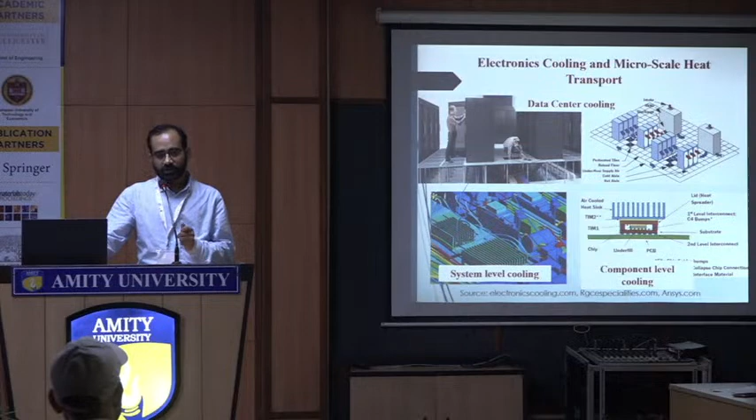So as you know, like how we are cooling the data centers and the computers, and the heating problem in mobiles and laptops, etc. Starting from the chip, which is very, very small, how can we cool it where the heat dissipation is very high, of the order of 100 to even 200, 300 and more watts per centimeter square area, which is very high. If you compare it closer to a power plant, then it reaches closer to nuclear power generation.

In the beginning, when the number of transistors in a chip was very small, it was not required to cool the chip using non-conventional ways, and it could be cooled naturally, sometimes by forced convection through air. But over time, as the number of transistors increased, and nowadays integrated chips are highly dense with millions and billions of transistors inside a very small chip, they dissipate a lot of heat.

So what is the temperature we want to keep the chip at for proper functioning, so that it has a longer life and can sustain as well? We have a range where we can maintain the chip at 40-50 degrees Celsius, and at the most we can go up to 80 degrees Celsius.

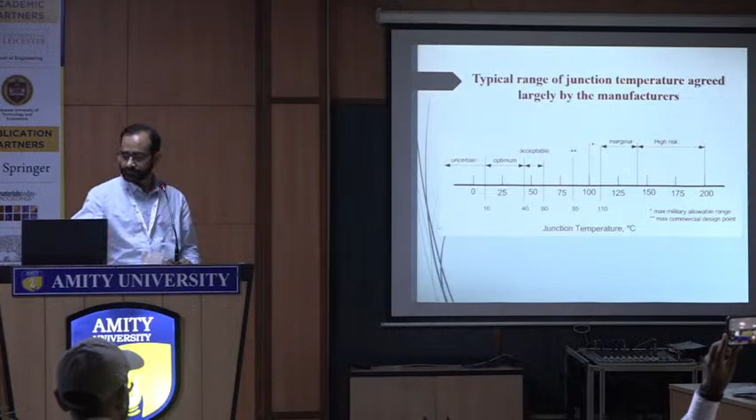And the heat dissipation over the chip surface, if you go over the years, we see that the heat dissipation from the chip is continuously increasing due to the high density of transistors that the chip consists of.

So what is the reason for electronics failure? If you look at it, the major part of electronics failure is temperature, including other factors like humidity, dust, and vibration of the electronics as well.

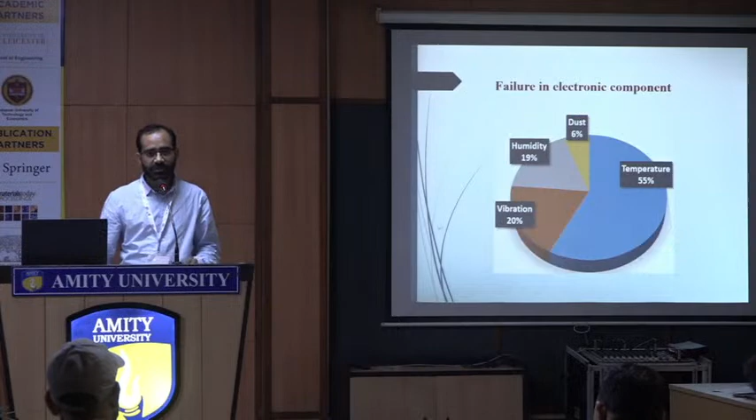So how do we control this temperature of the electronics, and how can we mitigate the temperature rise? There are different techniques, like putting a heat sink over the chip surface, and if we want to further enhance the capacity of the heat sink, we look at conventional ways of increasing the heat transfer rate from the chip surface and apply some non-conventional techniques to mitigate the temperature.

There are some techniques which were previously used for conventional systems like radiators and other condensers. We try to implement these techniques at the micro level, at the chip scale level. These techniques include surface roughness and surface enhancements, jet cooling, and scaling down the size of the flow channel so that we can have the scale effect for heat transfer enhancement.

These are the advantages when we talk about the microchannel. When you try to reduce the size of the heat transfer device, what we want to do is enhance the surface area and reduce the volume. So as long as we have a high aspect ratio of surface area to volume, we are moving towards a higher heat transfer rate.

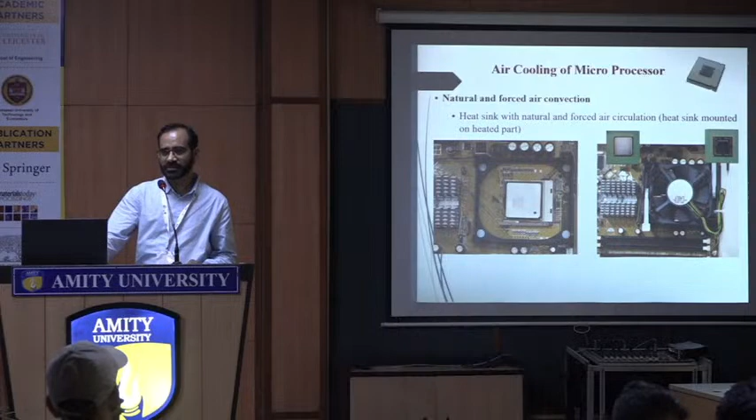As we know, the number of transistors is increasing and the flux generated at the chip surface is high, so natural convection is not sufficient to remove the heat, and then we use a fan over the heat sink. After that, even the fan was not enough, so we put a cold plate over the chip surface so that we are flowing liquid, which has a higher heat carrying capacity and can remove the heat from the chip surface. But that was not the end of the story.

So as the number of transistors further increased, we need to remove further heat from the chip surface and keep the chip down to the working temperature. So what is proposed is that we go to the chip itself and cool the chip through liquid cooling.

So how can we cool a chip which is very small, like 1 centimeter by 1 centimeter in area, using liquid? This can be done by engraving grooves over the chip surface, making channels over the chip surface. We can make simply rectangular channels or any shape of channels, and if we flow liquid through those channels, because of the scale effect, the heat transfer coefficient is very high.

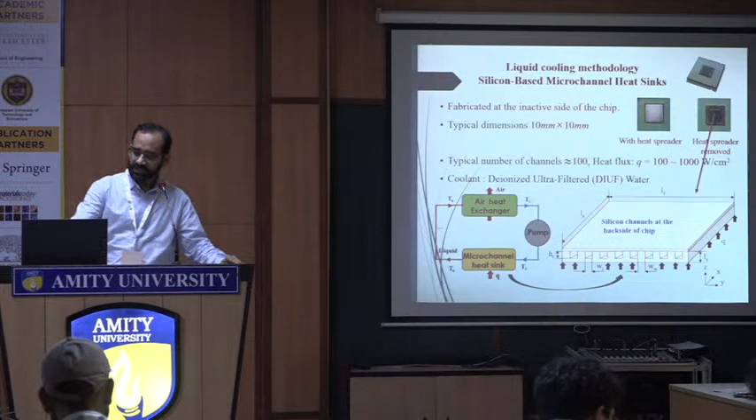So I hope you are getting the talk, because we are talking about the heat transfer coefficient and the heat transfer area. As you scale down the fluid channel, the hydraulic diameter goes down, and that basically contributes to the very high heat transfer coefficient. So scaling down and making micro channels, the advantage is we get a very high heat transfer coefficient, and that can take away higher heat flux.

So again, the story didn't end here. The rectangular channels have a limitation, and we want to further enhance the heat transfer. So how can we do that? We go from the conventional rectangular channel to different sorts of channels - it can be rectangular, triangular, trapezoidal, or oval or circular channels. Then we look at how, in conventional heat exchangers, we enhance the heat transfer.

So we looked at those ways and tried to implement those mechanisms into the micro scale geometry, and that can be a passive enhancement. In passive enhancement, we want to perturb the flow, and that perturbation enhances the mixing of the flow and enhances the heat transfer coefficient. So one way is putting roughness on the surface, putting pins on the surface, putting obstacles in the flow passages, so that can disrupt the flow and enhance the heat transfer.

So these were the works we did in the beginning, and then we published those works, and they showed some promising results - basically the heat transfer is enhanced and the capacity of the chip to cool down is increased. So these are some designs we tried with different sorts of passive enhancement mechanisms. Sometimes we put ribs, sometimes obstacles on the floor, sometimes made the walls wavy, and sometimes put grooves on the wall to enhance the heat transfer. So this is a summary of the different mechanisms we adopted to enhance the heat transfer.

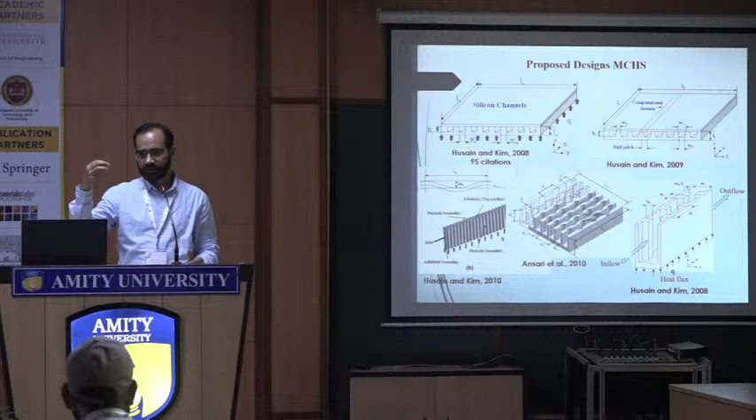For that purpose, what is proposed is that we should do jet impingement - we should do liquid impingement at different locations of the chip, so that the gradient can be decreased. That brings the development of jet impingement cooling for the chip surface and for electronics.

Different designs were proposed, and our group also proposed different designs - we can have different size jet holes, different arrangements of the jet holes, and different arrangements for the exit of the liquid that has already fallen onto the chip and struck the chip to cool it, and then we have to remove that liquid. So one thing is how you strike the liquid on the chip surface, and the other is how you take that liquid out of the chip surface, because it has already been heated up.

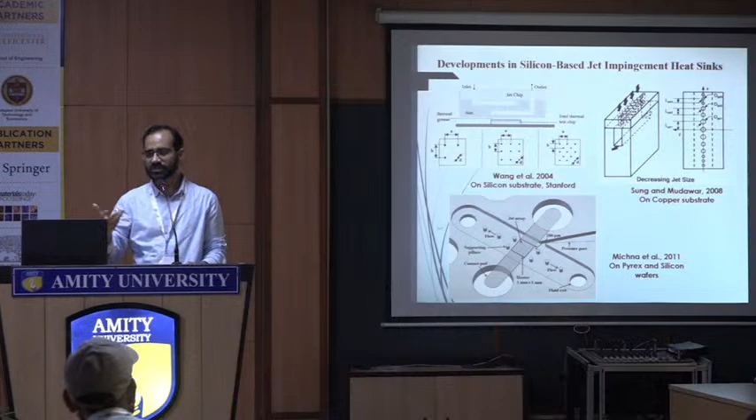So different mechanisms were proposed, and as you can see here, one way you are striking it, and the other way you are taking that liquid out of the chip surface. And remember that all of these were proposed at the micro level, where the dimensions of the holes are in microns, like 100, 200, 300 microns, depending upon the fabrication technology.

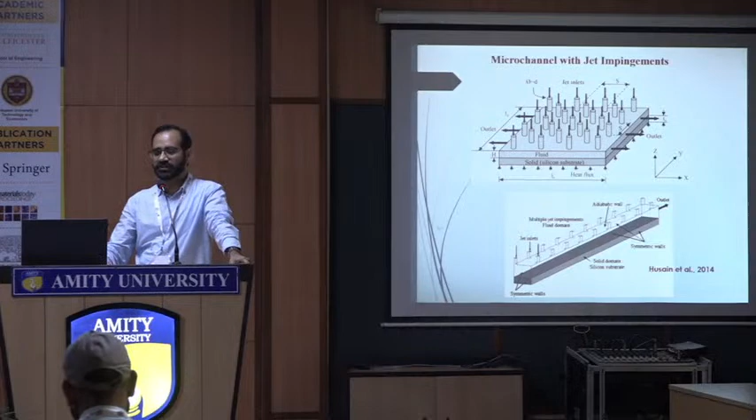So this jet impingement proved beneficial in terms of reducing the temperature gradient as well as unifying the temperature at the chip surface to some extent.

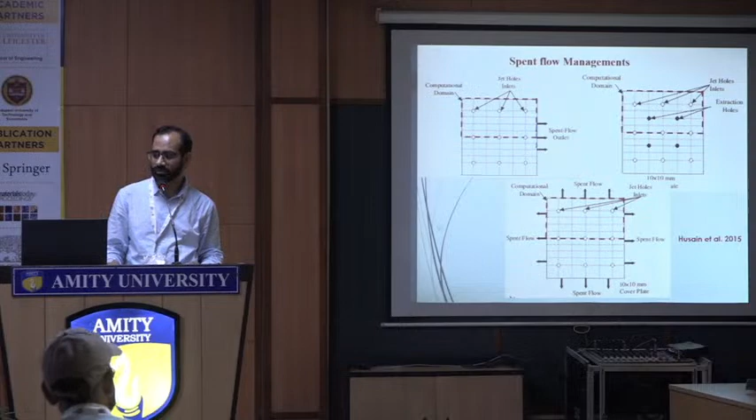And here you see there is a big jet that is striking the chip, and then there are small holes that are taking the liquid out. So the big jet at the center is basically impinging the chip, and then the small holes are basically taking the liquid out of the chip domain.

So we did all of this study mostly numerically, and we did some experiments to verify our numerical model against the existing experimental studies as well as our experimental study. So again, we want to further enhance the heat transfer rate, and what can we do? So we implemented the passive enhancement methodology as well as the jet impingement.

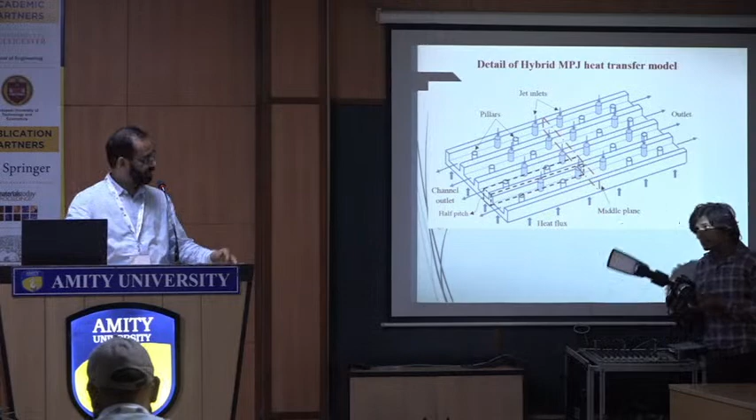The passive enhancement perturbs the flow and that can enhance the heat transfer, and the jet impingement can basically create a stagnation zone and a thin boundary layer, which can enhance the heat transfer. So we proposed the hybrid design, which includes the passive as well as jet impingement technology in the same chip module, as you can see here. This also showed a good result and decreased the chip temperature.

Further, since we are striking the jet on the chip surface, we looked at what can be the most suitable angle. So we looked at the parameterization of the angle and at what angle can be the best angle for the chip cooling.

And currently what we are doing is trying to implement porous material inside the channels. As we know, porous material has high capacity for heat transfer because of the pores inside the material, which give us high surface area, and that surface area leads to a high heat transfer rate. So if we insert the porous material, it increases the heat transfer, but the disadvantage is that it creates a lot of pressure drop.

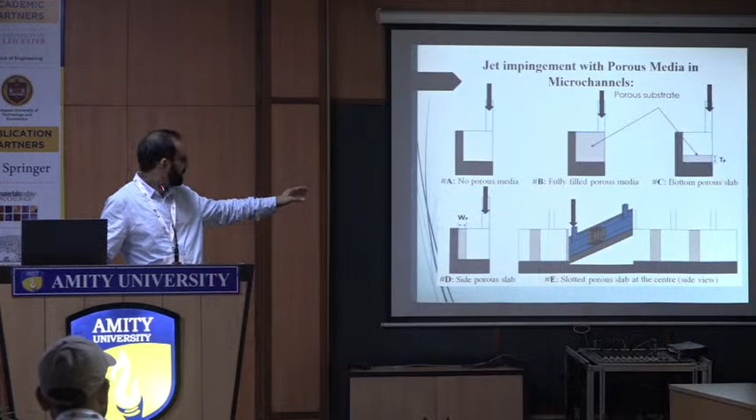In the second, we have the porous material completely filling the channel, and then we have the porous material lying on the bed, and another lying on the side, and the fifth case where we have porous material along the direction of the flow, at intermittent locations. So we studied all these scenarios and looked at what is the best possible option for these porous material inserts in the channel.

So for all these, if we looked at the numerical methodology, the flow is laminar flow because it's a micro scale and very low speed flow. And the flow is steady, and because the liquid is flowing in the channel, it's incompressible. So we applied a steady state laminar incompressible flow model, and we use the commercial software ANSYS. We use CFX as well as Fluent to solve these kinds of problems.

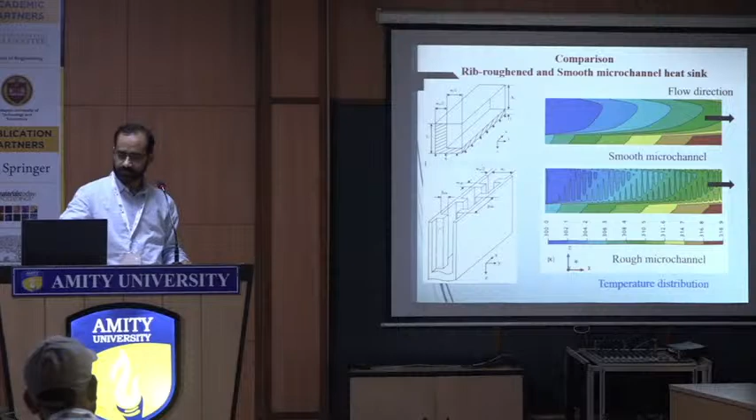And so here are some results. When there are parallel channels, there were no perturbations in the fluid. So we see in the upper picture the temperature is higher on the chip, and we obtained a lower temperature when we use the roughened surface and when we use the perturbators in the channel. And the same case is there, that we have the higher temperature when it's a smooth channel, and we obtain the lower temperature when we use the rough channel.

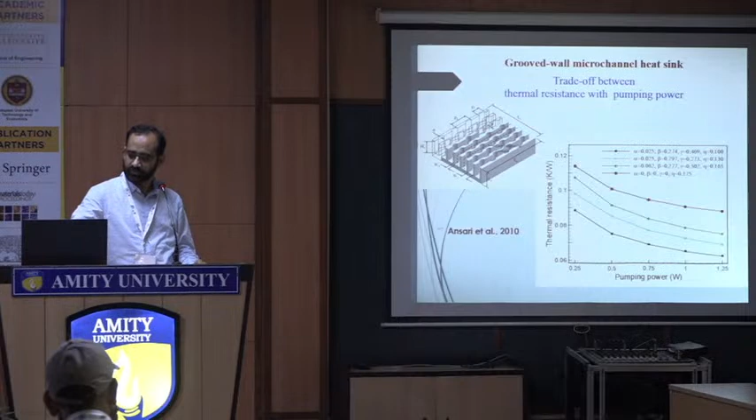As for the jet impingement, we looked at the temperature profile and the velocity profiles. So here we see how this velocity goes, where the jet is impinging on the surface, and then the liquid is coming. The liquid is coming from the different jets, and these different jets accumulate the liquid, so the velocity is higher near the outlet.

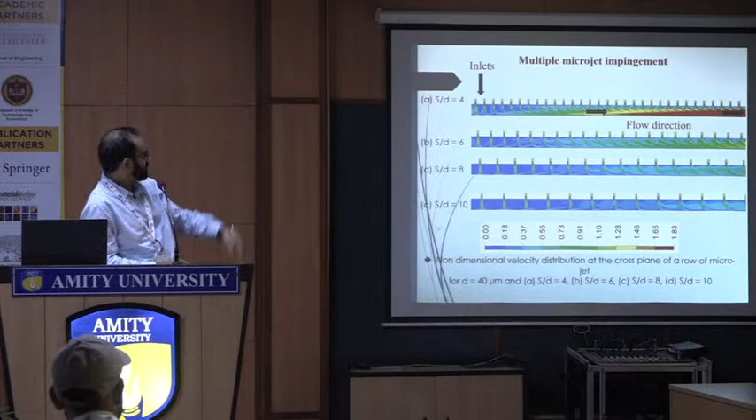But the disadvantage with this multiple jet impingement is that in the beginning, towards the inlet, the jets are striking at the base. But as we go downstream, the jets are not striking at the base, because the fluid coming from upstream jets is basically flooding the jets that are on the downstream side. So again, this is the problem that we have to eradicate.

If we look at the temperatures, we can see the different combinations and different sizes of the jet, and we did the parameterization to see the best possible option for temperature minimization, depending upon what should be the jet size and what should be the pitch of the jet. So here are some further results that show what possible combination can be best suited for minimizing the chip temperature.

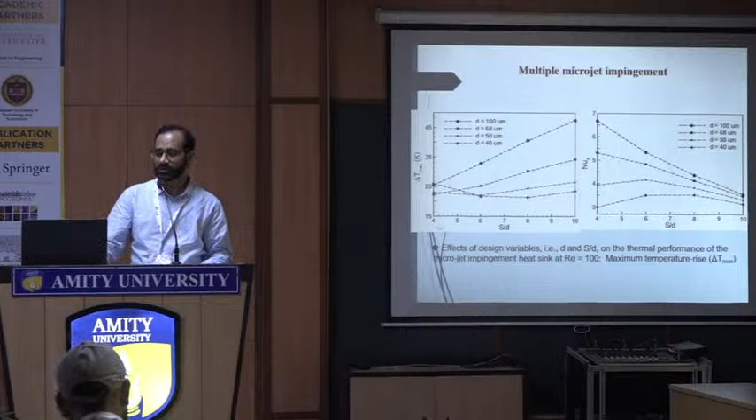So these are some results that we have, and all of these results show that the techniques that we implemented benefited in reducing the temperature, and that can give the electronic designer a chance to further enhance the transistor, let's say to increase the transistor density in the chip.

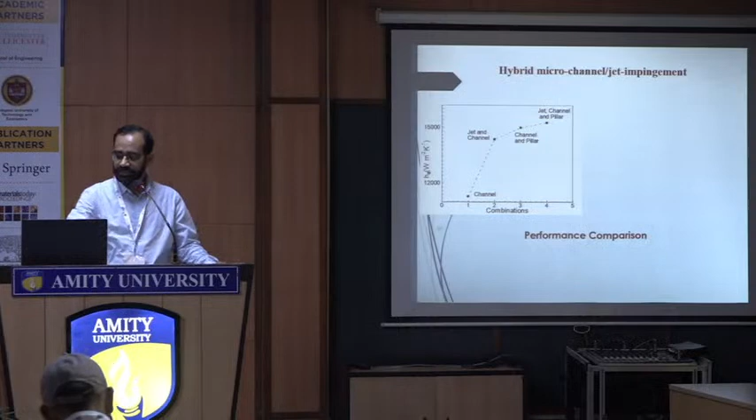So the development of the thermal management goes parallel with the design of the integrated chip. The integrated chip is over time integrating more and more transistors. So as thermal management engineers, we have to manage how we can remove the required amount of heat from the chip surface. So this is the development over the years that we have done through our research, and here are some results as you see here.

So to conclude, if we have the roughened channel and the perturbations in the channel, that gives the advantage of higher heat transfer. And if we have multiple jets, that gives us a more uniform chip surface temperature, and that decreases the temperature also. At the same time, if there is any hot spot on the chip, the jet impingement can mitigate that hot spot as well.

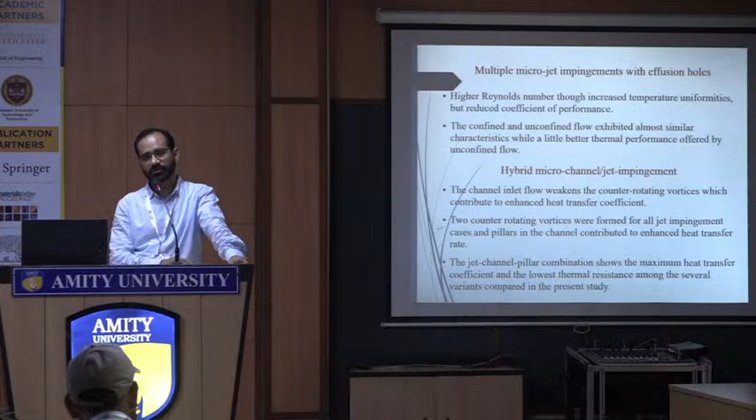And if we have the effusion holes with the jet impingement, that also provides an advantage, because once the liquid has struck, if you want to remove that liquid, it can be removed through the effusion holes. So when we have a hybrid design, that is the jet impingement as well as the passive enhancement, you are basically employing three technologies: the microchannel technology, the passive enhancement technology and jet impingement technology.

And when you have the porous slabs, you have to be very wise how to use them, because the porous material inside the channel increases the pressure drop, so it cannot be used blindly. Where it can be used, a proper combination and placement of the porous material is important to reduce the pressure drop as well as get the advantage of higher heat transfer.

So I presented a broad picture without going into the intricate details of the model and the results, because I know that it's a general audience, and if I go into the detail, it may not be understood. So if you have any questions, please let me know. And if you want to know any further detail about the modeling, about the design, you can contact me.

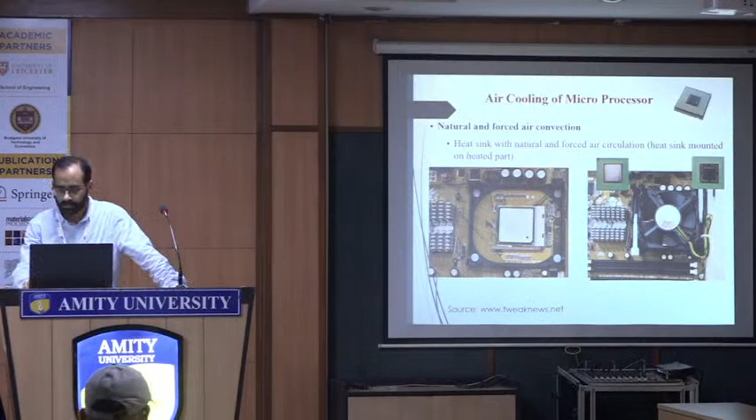You mean like when the channels are on the chip itself? The one which you showed earlier to me. Which picture? This one. Yeah. Depending, but I don't think so because it's a very compact structure. It's a commercial plate basically, cold plate. We call it cold plate and we call it heat sink. It's now coming in high-end workstations or high-end computers, which are multi-core.

Generally, military grade components. Are these available in military grade? Are you aware? I'm not sure about military grade. Like the HP range of workstations, the higher end ones are using this liquid cooling, but the lower end ones are still relying on fans. The higher end liquid cooling workstations may have multiple processors, maybe 16 processors or even more.

Thank you, sir. Good afternoon, everyone. I welcome all of you to my presentation, titled the design of efficient quadrature scheme in finite element using deep learning. The authors of this work are Rohan Chinskar, myself, Deepjyoti Nath, and Dr. Sachin Singh Gautam. The content of this presentation is as follows. First, I will briefly introduce the work, finite element analysis and the artificial neural network we used, followed by the methodology, results and discussion, conclusions, and the

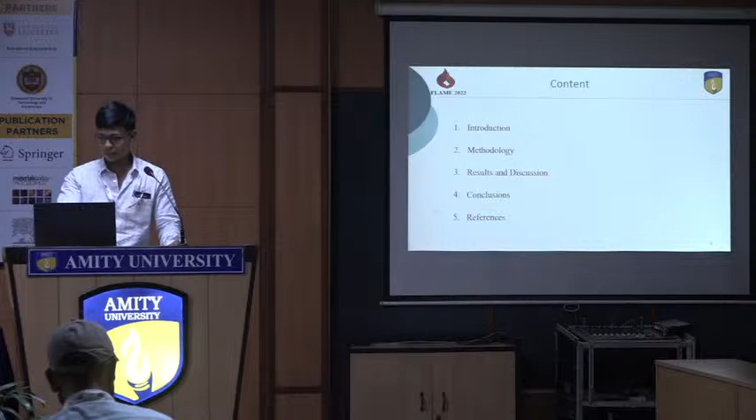relevant references. As we all know, finite element analysis is a numerical technique used to solve partial differential equations. The basic steps of finite element analysis involve pre-processing, processing, and post-processing. Our work is focused on the processing part. In the processing part, in structural analysis, we compute the stiffness matrix and solve for the primary variables. In computing the stiffness matrix, we use the Gauss quadrature scheme, which is an integration scheme. So we try to optimize that Gauss quadrature scheme using an artificial neural network.

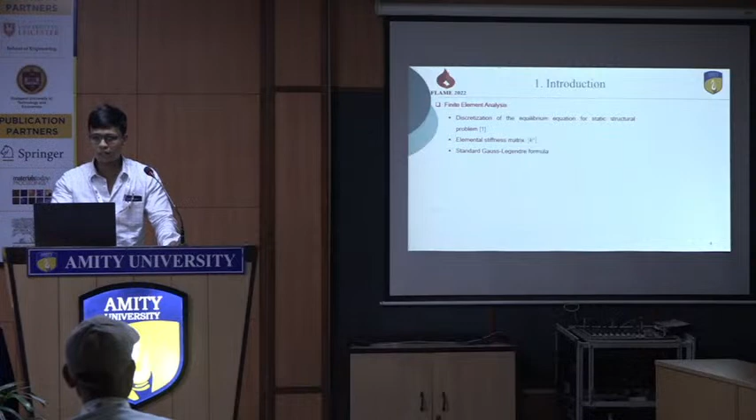So the discretization of the equilibrium equation for a static structural problem leads to the following equation, where K is our stiffness matrix, U is the nodal displacement, and F is the nodal force vector. The elemental stiffness matrix is given by the following equation, where B represents the strain displacement matrix and D is our material constitutive matrix.

To integrate the elemental stiffness matrix or any other elemental quantities in finite element analysis, we usually use the Gauss quadrature scheme. In the Gauss quadrature scheme, the integration is replaced with the weighted sum of the integrand. We evaluate the integrand at some prescribed points, which are called Gauss quadrature points, where xi is the Gauss quadrature point and wi is the corresponding weight.

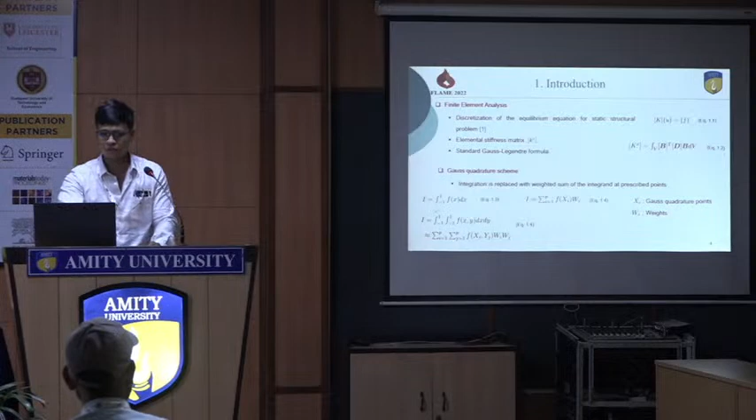Similarly, equation 1.4 is for one-dimensional integration, and for surface integration and volume integration we can also use the usual Gauss quadrature scheme. Coming to how the Gauss quadrature scheme is implemented in the finite element method, we are focusing on how to optimize the Gauss quadrature scheme in calculating the stiffness matrix. Here are the equations for the stiffness matrix for 2D and 3D analysis.

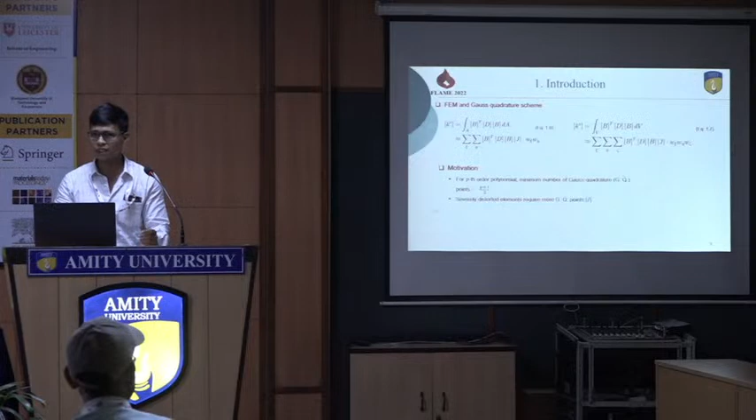The motivation of the work is that in the Gauss quadrature scheme, if the order of the polynomial is p, then we require a minimum of (p+1)/2 Gauss quadrature points. However, for highly distorted elements we require more Gauss quadrature points. Suppose the minimum number for a perfectly shaped element is 6; if it gets distorted during loading, we require more points to integrate the element stiffness matrix. So the objective of our work is how to get the optimum number of Gauss quadrature points to compute the stiffness matrix for an element.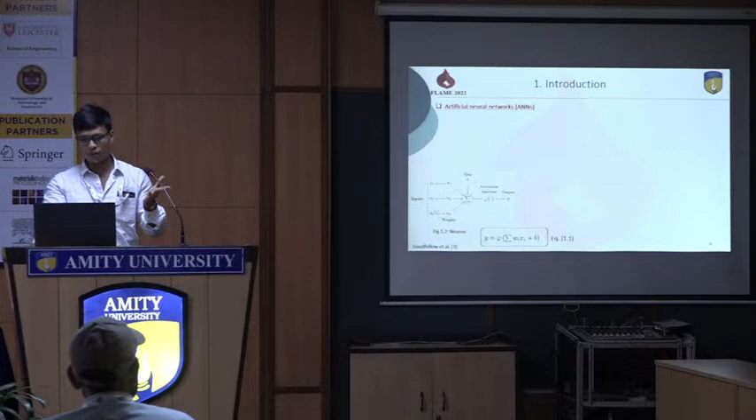We feed the weighted sum of these inputs and synaptic weights to the neuron, and the activation function maps these inputs to the corresponding output of the neuron. Here are the various activation functions we use depending on what type of problem we are solving, so the activation function generally changes.

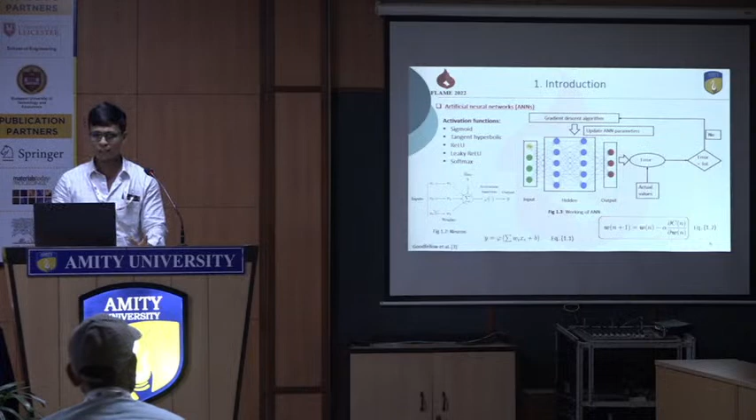This figure shows a schematic architecture of an artificial neural network, where we take the input as the first layer, these inputs pass through a sequence of hidden layers, and we get the predicted value of the network at the output layer. In the next step, we compute the error between the output of the neural network and the actual value, and we try to minimize this error using the gradient descent algorithm. We continue until we reach the minimum error tolerance, and the parameters of the neural network, corresponding to the synaptic weights, are updated using gradient descent.

Coming to the relevant literature, here I am going to discuss only the literature on the application of machine learning in finite element analysis. There is one work called smart finite element, which directly predicts the nodal forces from the element state without computing the displacement field. We all know that in solving the finite element method for structural analysis, we first compute the displacement field, then we compute the elemental nodal forces. But in this work, they have directly taken the element state and computed the result directly.

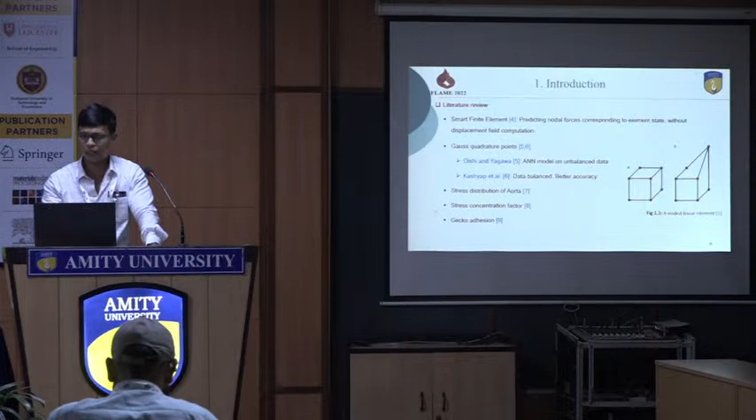The optimum Gauss quadrature scheme has also been studied by Oishi and Yagawa. In their model they also tried to optimize the Gauss quadrature scheme, to get the optimum number of Gauss quadrature points and weights. However, in their model, the data are highly imbalanced. So we have worked to improve the accuracy of the model by data balancing. Coming to the stress prediction,

We all know that when our finite element meshes are very fine... Last 5 minutes. Okay, sir. Then I will just skip this part and move to the methodology. Okay.

So to get the data to develop the artificial neural network model, basically what we do is we change the nodal coordinate of the 8-noded hexahedral element with this following relation.

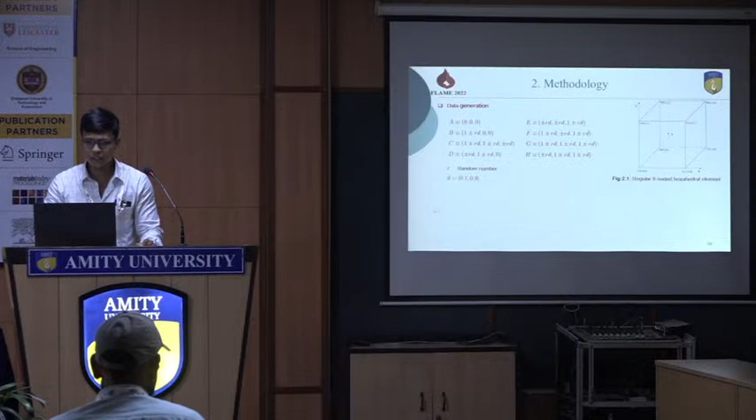So here we can see the some of the deformed elements. Basically we are trying to find out what will be the optimum number of Gauss quadrature points for different shapes of the elements.

So the basic data generation procedure is as follows. We basically take the geometry of the element, the Young's modulus, and the Poisson's ratio, and we compute the stiffness matrix using some qth Gauss quadrature point. It varies from 1 to 9. Then we compute the error, and we say that the optimum number of Gauss quadrature point is q if we get an error of less than 10 to the power minus 3.

So here we can see in figures 2.2 and 2.3 the training data distribution and the test data distribution. Training data are those which we basically use to build our neural network model, and test data are those which are not seen by the model. We want to test the model and see how it performs.

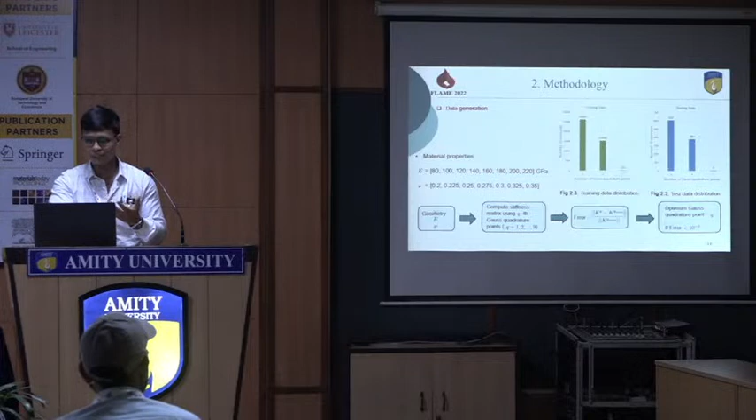Coming to the results and discussion, as can be seen from table 3.1, we have got very high training accuracy. However, the testing accuracy for 5 Gauss quadrature point is very low. The reason is that the data we generated for this 5 Gauss quadrature point is very less. Due to this data imbalance, the model is not predicting for this particular Gauss quadrature point very well.

Also, the highlight of this work is that the accuracy of our model is better than the Oishi and Yagawa, and Kashyap and others, whatever model they have developed.

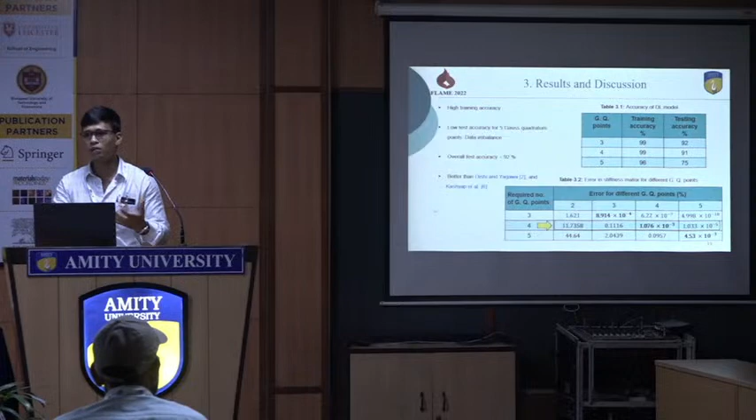So in table 3.2, we can emphasize the fact that if suppose we require 4 number of Gauss quadrature points to calculate the stiffness matrix, now suppose if we use 2 Gauss quadrature points, it gives an error of 11.7358%. And if we keep on increasing the number of Gauss quadrature points, the error value basically decreases. But as we keep on increasing the number of Gauss quadrature points, the computational cost will also increase parallelly. So we basically need to find out what is the optimum number of Gauss quadrature points that we should use, so that our accuracy is within our prescribed or desired limit.

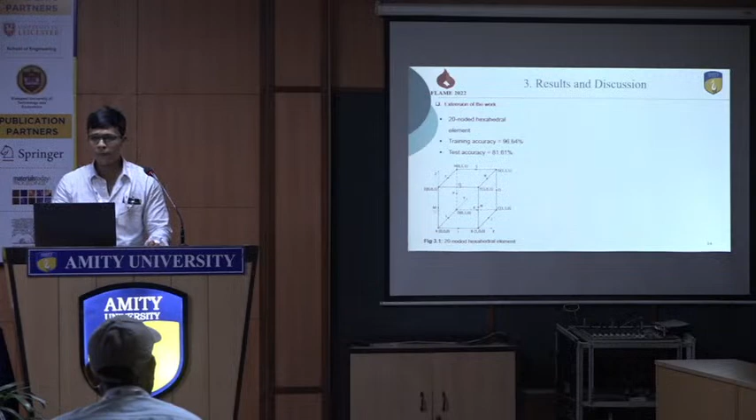So coming to the conclusion, we can see that deep learning basically can be used for predicting the Gauss quadrature point for computing the stiffness matrix, which can significantly reduce the computational cost. Also, our model is capable of handling different kinds of materials. In the earlier works presented by Oishi, Yagawa and Kashyap and others, they did not consider the variation of the material. They have only considered the variation of the shapes of the elements.

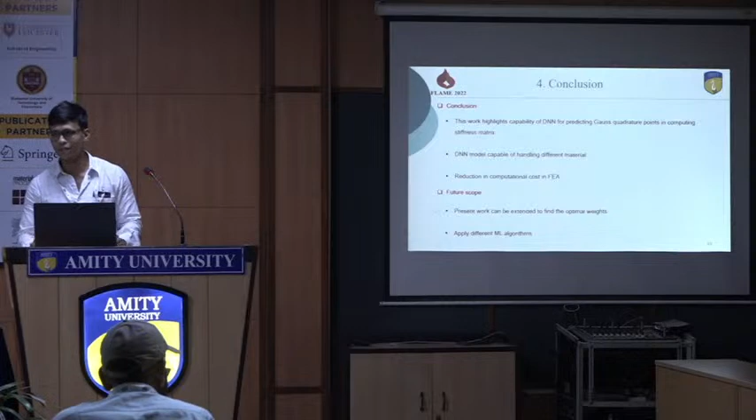Coming to the future work, this work can be extended to find out the optimum number of weights in the Gauss quadrature scheme also, because here we only did it for finding out the number of Gauss quadrature points, but in the Gauss quadrature scheme there is also a weight factor which is multiplied with the integral. So this work can be extended to find out the optimal weights also, and we can also apply different machine learning algorithms to find out the optimal number of Gauss quadrature points. Here we have only tried with the artificial neural network.

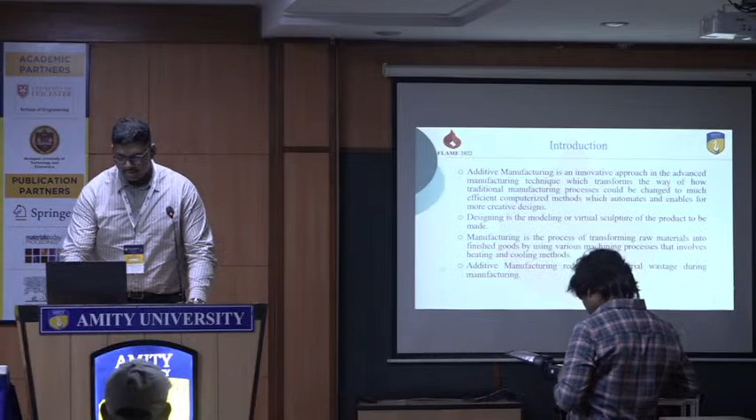Additive manufacturing is one of the most innovative approaches in advanced manufacturing techniques, and it has transformed the way we look at manufacturing and designing of equipments, products, and various other things. It has changed our traditional view from subtracting from a base material to addition. We have reduced or minimalized the waste of materials, and incorporated technology and automation into the process. Designing here is modeling or virtually sculpting the product to be made, and manufacturing is transforming the raw material into finished goods.

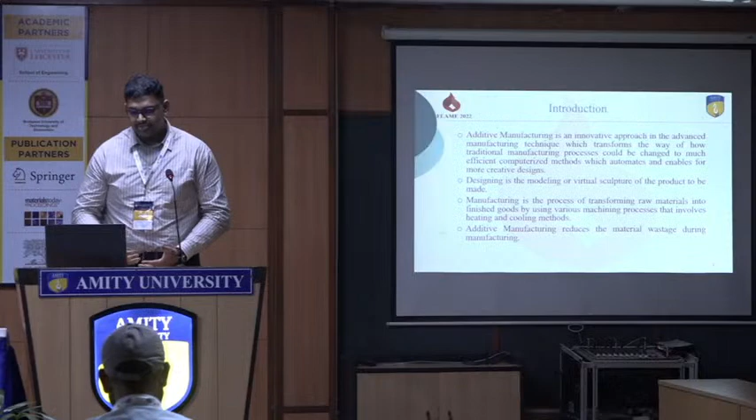As I've already said, additive manufacturing has significantly reduced the wastage of materials. The methodology adopted here is a systematic review of papers, and we have incorporated papers after 2010, since the technology has evolved over the period of time, narrowing down to 26 papers included in this review. All the papers we reviewed have topics related to the design and manufacturing of additive manufacturing.

Talking about the literature review, surface roughness was one of the most identified challenges, occurring repeatedly, creating irregularities and reducing the overall aesthetic of the component. Along with surface roughness, residual stresses were also a defect that arose in research, and these residual stresses have caused variations in the overall manufacturing of the product and its overall functioning.

When we look at the overall component, we'll have small build angles formed during additive manufacturing. These build angles are usually not very visible to the eye, but when we do SEM testing or look under the microscope, we can see small build angles. These are usually due to process parameters involved in additive manufacturing, such as the orientation of the print and the fill densities.

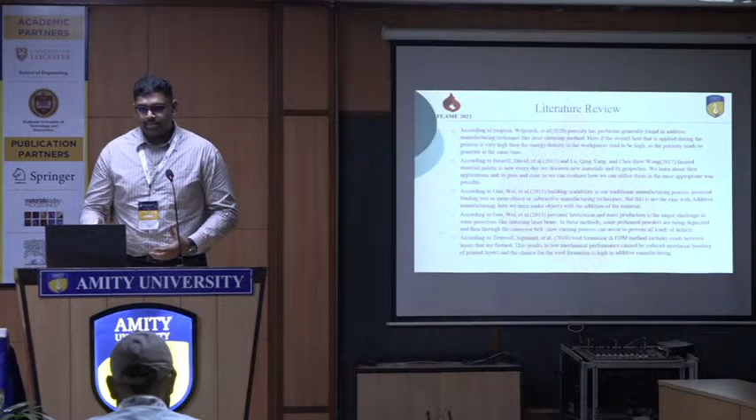Then we have the limited material palette. Over the years, different materials have been introduced into the additive manufacturing field, and we now have a wide variety of materials. But even these materials are still limited, because we are not able to build particular material products that need more strength, or we need to bring more different properties.

Another issue here is building scalability. Building scalability basically comes to large-scale production, and personal fabrication techniques or mass production.

To sum up the literature review, we have separated these challenges into the design process, that is surface roughness, residual stresses, formation of build angles, impact of energy density on flexural property, effect of notch load interaction on mechanical property, impact of heat treatment on additive manufactured parts, and effect of tensile property.

And then the manufacturing, that is stair steps, void formation, porosity, limited material palette, building scalability, personal fabrication, mass production, and rheological scaling of spherical powder dispersed in thermoplastics.

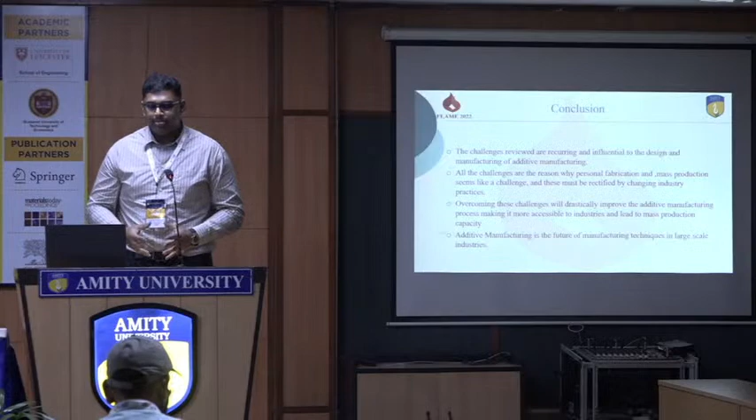To conclude, we need to solve these challenges in order to improve the additive manufacturing process and make it more accessible to industries, and gradually move into large-scale mass production. Additive manufacturing is the future of manufacturing techniques in large-scale industries. Thank you. And these are the references.

You did a literature review. Yes, sir. What top three research gaps did you observe from your research? We observed the research gap from these challenges: most of the papers speak about only a few points and have not discussed them in depth. We have taken the research further into MCDM analysis to segregate these challenges and analyze how each challenge affects the process.

And we have found that FDM is one of the most flexible, the challenges are very few for FDM manufacturing, and we have done more research on that. What have other authors discussed, and what did you find needs to be discussed? In most of the papers, only a few of the challenges are solved. More are left unsolved. So these are the main challenges that have to be rectified to move into large-scale production of additive manufacturing.

I just want to ask a simple question. Sure, sir. When was the term additive manufacturing coined? Did you check when that word came into existence, the first time they started using it? I'm sorry, sir, I don't recall. The term additive manufacturing, you mentioned it, right? So when was it coined? Did you check? Because you said that before 2010 there was no...

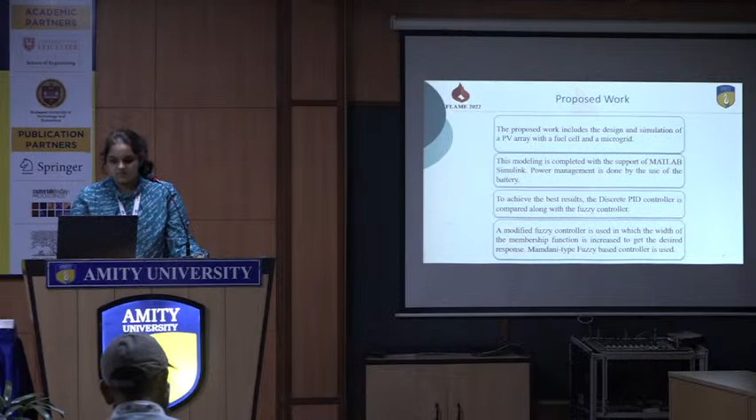So my proposed work is as follows. The proposed work includes the design and simulation of the PV array with the fuel cell and the microgrid. Modeling is completed with the help of MATLAB software. The power management is done with the help of the battery. To achieve the best result, the discrete PID controller is compared with the fuzzy controller. A modified fuzzy logic controller is used in my system, in which the width of the membership function is increased to get the desired response. I have used a Mamdani type fuzzy logic controller.

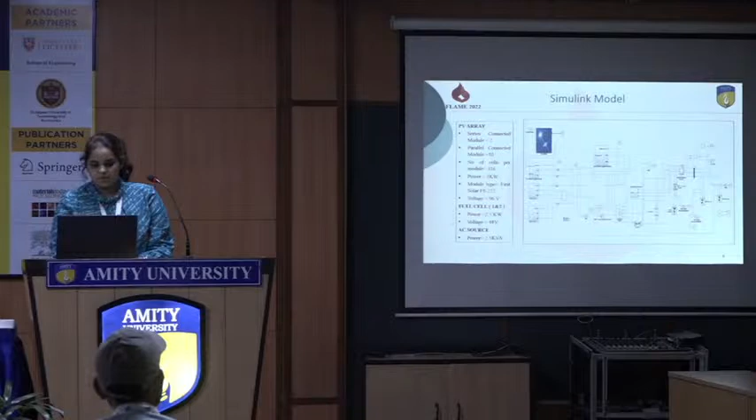The two fuel cells I have involved in this work are of power 2.5 kilowatt and voltage 48 volts respectively. These three devices are connected in parallel with each other. Then they are connected with the battery, which performs the power management function. The battery is then connected to the inverter, and then it is further connected to the universal 3-bridge system.

And then there on the right hand side there are the loads that are connected. There are two types of load I have involved in this work. They are basically the RL loads that I have used. One is of 8000 watt and the other is of 10,000 watt.

In this type of model I have basically used two types of controller. The first one is the discrete PID controller, and the second one is the fuzzy logic controller, for checking the control systems. So discussing the control schemes, there are two control methods. The first one is the discrete PID controller.

The design of the system employs a discrete PID controller. It is the most widely used controller in industries. It has a faster response time as compared to the normal PID controller. In this system, Kp is considered to be 1, Ki to be 1, Kd to be 5 and the filter coefficient is considered to be 100. The selection of the parameters is done on the basis of the trial method.

The second type of controller I have involved in this work is the fuzzy logic controller. Basically, I have used a modified fuzzy logic controller. In this, the width of the membership function is increased to give the desired result. The input and output values are defined using the following variables: NB negative big, NM negative medium, NS negative small, ZE as zero, PS positive small, PM positive medium and PB positive big.

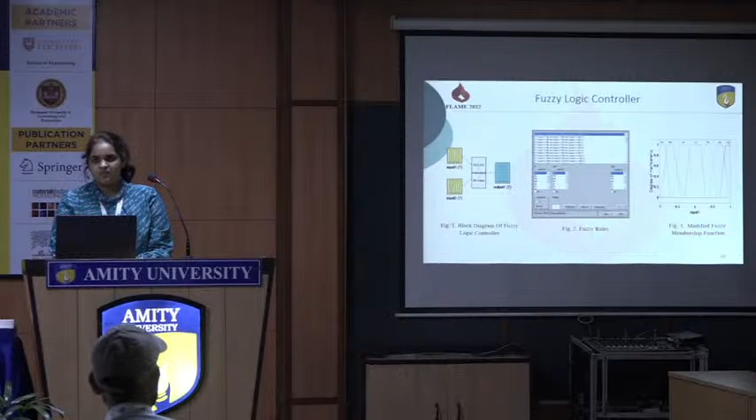For comparison purposes, 3-phase bus voltage and current waveforms, load voltage and AC source voltage are considered. Shifting towards the fuzzy logic controller, figure 1 here represents the block diagram of the fuzzy logic controller. I have defined the 49 rules that I have used for the fuzzy logic controller. Figure 2 represents the fuzzy rules that I have used for my work. And figure 3 here represents the modified fuzzy membership function.

The difference between the membership function I have used and the work that is already done is that I have used a modified fuzzy logic controller in which the width is increased. That gives a better response. Now shifting towards the simulation results I am getting.

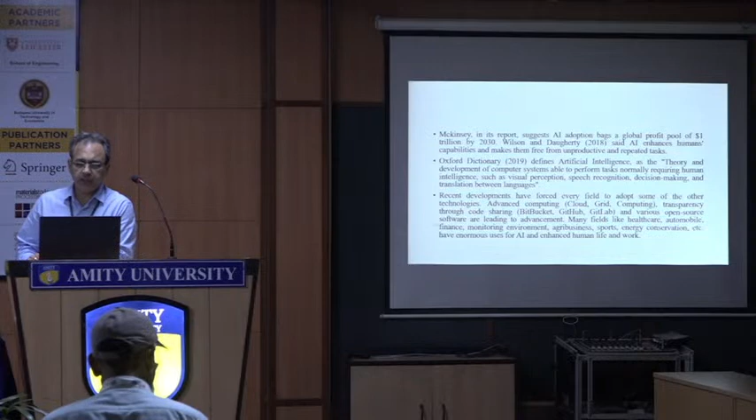Being in management, I really don't know what all these technologies are or how these work. I only have read about their implementation, how these can be useful for us. And various open source softwares are leading to advancements. Many fields like healthcare, automobile, finance, environment monitoring, agribusiness, sports, energy, conservation, etc. have enormous use of AI to enhance human life and work.

In areas like engineering and IT, analytics have been using AI for quite some time, but now the areas of management and marketing also started using AI and getting a lot of benefits. Data of market analysis, customer insights, and competitive intelligence from various channels of distribution and communication are analyzed, and strategies are formed with predictable results.

So retailers like Amazon have been tracking our data, and their coding and all those technological advancements are helping them predict what orders these customers are going to give in the next season or the next purchase order. So from the back-end side, when they are planning their supply chain and procurement from various sources, they are very easily able to manage it.

Because normally a retailer used to keep a few thousand stock keeping units. But these online retailers have lakhs and lakhs of stock keeping units. And from a supply chain perspective, managing all these items is a very difficult task, and all these types of technologies are certainly helping them decide how much they should procure, from where, and how.

One study by Mazurek found that IT services naturally benefited marketing science. IT and marketing became natural allies and achieved synergy. It becomes important to study and understand AI, its available tools, and their applications in marketing. Technological advancements are happening with lightning speed: virtual conferences, robotics, self-driving cars, smart equipment at home, smart healthcare monitoring patients in hospitals, online gaming like chess and Go, and other innovations under AI and deep learning.

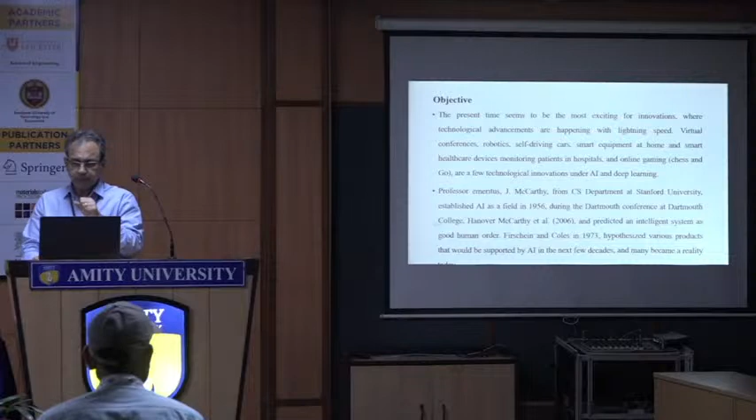Professor Emeritus J. McCarthy from the CS Department of Stanford University established AI as a field in 1956 during the Dartmouth Conference at Dartmouth College, Hanover. McCarthy in 2006 predicted an intelligent system as good as a human. Firschein and Coles in 1973 hypothesized various products that would be supported by AI in the next few decades, and many have actually become a reality nowadays.

Grönroos, a marketing professor, said delivering value to customers is a critical aspect of marketing. That value may be goods, service, ideas, information, or a solution to a customer's requirement. Bennett said that E.J. McCarthy conceptualized the marketing mix 4Ps: product, place, price, and promotion, given by this gentleman way back, and later professors started building marketing concepts on these 4Ps.

These 4Ps were drawn from a concept by Borden, another professor: 12 fundamental mixes of marketing. I'm not going to read them. So our goal is to find the opportunities for AI applications in marketing and study two questions: in which areas AI is applied in marketing, and the implications of AI for marketing practitioners.

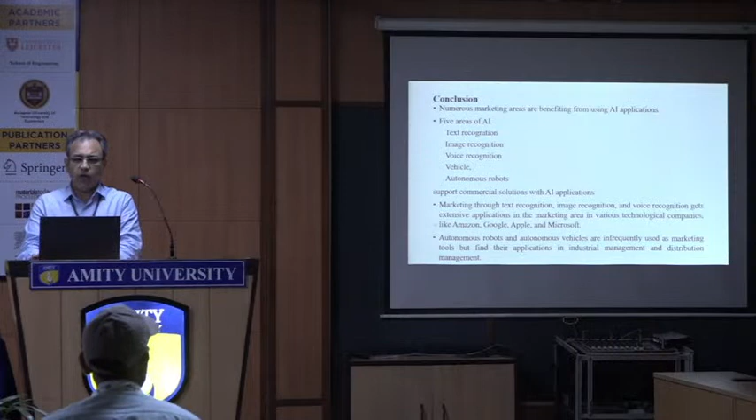Support commercial solutions with AI applications. Marketing through text recognition, image recognition, and voice recognition gets extensive applications in the marketing area in various technological companies like Amazon, Google, Apple, and Microsoft. Autonomous robots and autonomous vehicles are infrequently used as a marketing tool, but find their applications in industrial management distribution.

So actually it was from the management area, but I find it relevant to have it in a conference in an engineering background so that I may be able to do the justice. So I have one question. Please do some case study so that we can see the practical difference the AI is creating in the market. Certainly, I would like to be there in this and will do this. So nice of you. Thank you very much.

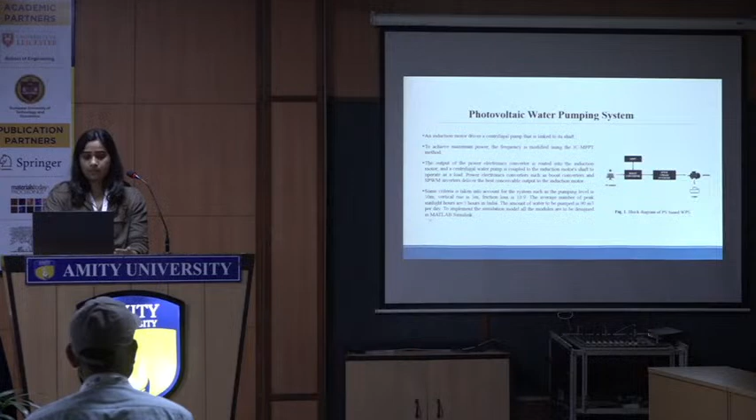Some criteria are taken into account for the system, such as the pumping level is 50 meters, vertical rise is 3 meters, friction loss is 10%. The average number of peak sunlight hours is 5 hours in India. The amount of water to be pumped is 90 cubic meters per day. To implement the simulation model, all the modules are to be designed in MATLAB Simulink.

When the switch is turned on, the diode reverse biases, isolating the load stage. The inductor stores energy from the input source. When the power switch is turned off, the load stage receives energy from both the inductor and the source. Thus, the load voltage is larger than the source voltage. The downsides of typical boost converters are high ripple current on active and passive components, high voltage stress for power switches, and the need for a large capacitor value to maintain a constant output voltage.

Next, we will discuss the SPWM switching technique. It is a method that employs two types of waveforms: a reference waveform and a carrier waveform. The reference waveform has a fundamental frequency and is sinusoidal, while the carrier waveform has a high frequency and is triangular. The frequency of the carrier waveform determines the inverter switching frequency.

As the carrier frequency rises, so does the switching frequency, and the frequency of the inverter output is determined by the frequency of the reference waveform. Comparing the carrier waveform outputs to the reference waveform outputs yields the output frequency. The modulation index can be used to adjust the fundamental frequency component of the output voltage.

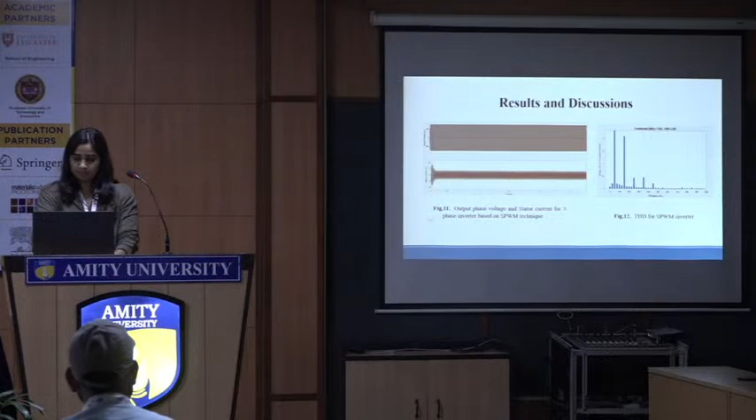So I will conclude by saying that the primary purpose of a boost converter is to raise the voltage from a lower fixed value to a higher one, and this allows the boost converter to be utilized for applications involving solar systems that are either independent or grid connected. An inverter is required in a grid system for the purpose of converting direct current to alternating current.

On the other hand, for the sake of this investigation, the fundamental circuit was utilized in order to keep the system's overall complexity to a minimum. The proposed work intends to create a control circuit, an inverter circuit, and a boost converter circuit as part of a complete switching strategy for inverter applications.

Simulated and analyzed variables include total harmonic distortion, voltage, control circuit output waveform, inverter circuit, and boost converter circuit. According to the investigation, the inverter has a THD of 2.24%, which is within the IEEE requirements. These are the references. Thank you.

Dr. Palvi, I am a bit confused, can you go to the slide before the conclusion, the result simulation? Yes, before that. Before that. And one more. In this, you are using 'this system may generate up to 200 watts of voltage.'

Is 200 watts of active power? Yes, sir, it is. Like that, earlier also you were mentioning 43.2... ampere, 0.06 ampere. Is it ampere or volt? It is volts, sir, 0.6 volts of open circuit voltage.

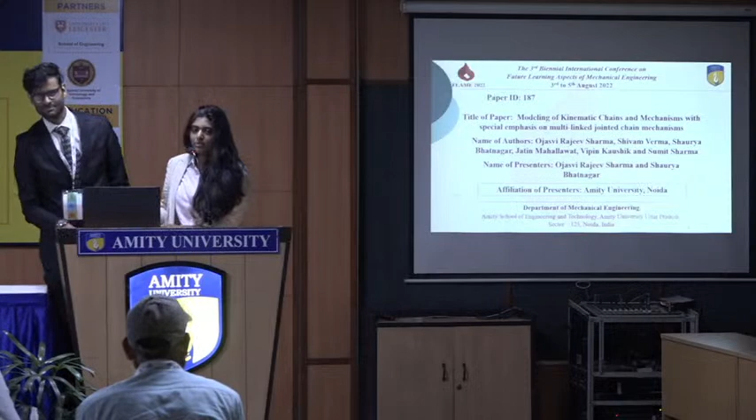I would like to begin by saying I was very inspired by all of the faculty's presentations. The title of our research paper is Modeling of Kinematic Chains and Mechanisms, with special emphasis on multi-linked jointed chain mechanisms. Today, the presenters will be Ojasvi Rajeev Sharma, my good friend and colleague, and myself, Shaurya Bhatnagar.

As you can see here, we have the introduction, the literature review, problem formulation, methodology, results and discussion, conclusion, and references.

You can obviously read the points here, but I'd like to begin by saying we were focusing on kinematic chains as a crucial part of any machinery. With the advancements in technology, the structure of kinematic chains has also become more complex. I'd like to give you a giveaway here that we are focusing on 8-link kinematic chains, because we want to give rise to better usability and more precise movements in chains. The higher the number of links in a kinematic chain, the higher the accuracy and the movability.

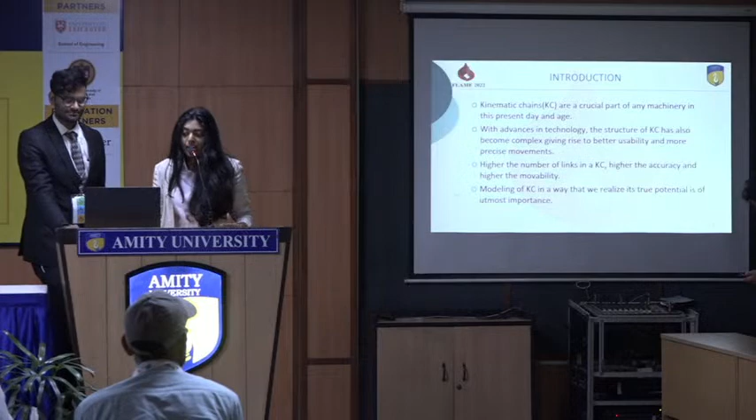I want to quote an example here: we could consider surgery as a very important example. The higher the accuracy and the higher the number of links, the higher the precision we will have in robotic surgery, which is one of the examples. Modeling of kinematic chains in a way that realizes their true potential is of utmost importance.

I would like to invite Ojasvi to talk about the literature review. During this literature review, we went through a lot of research papers done by very learned people. What we are trying to do here is detect isomorphism in kinematic chains, because a chain might be 8-link, but there are various different structures in which those 8 links can be put together.

That is the thing we are trying to discover here, because the way a kinematic chain works is that you might find the same movability, but the structure can be different every single time. The limits of that kinematic chain can be construed the same way, but the way it is structured is different. That is what is beautiful about a kinematic chain in general.

There were a lot of ways in which isomorphism could be detected. In our literature review, we found ways like the joint-joint matrix, McKay's algorithm, and topological graphs. But we found that all those approaches were way too complex for even a normal student to get into.

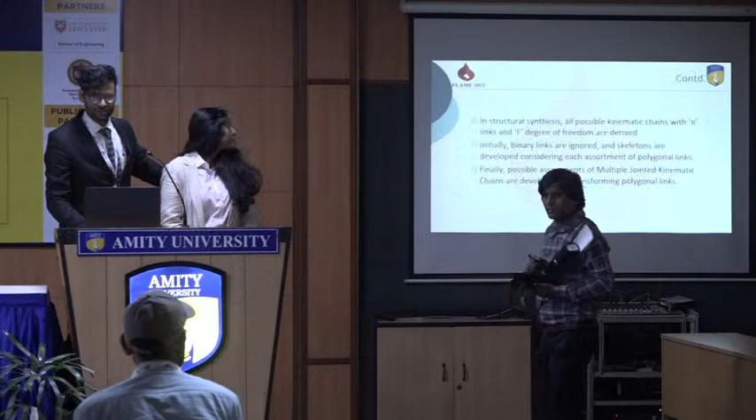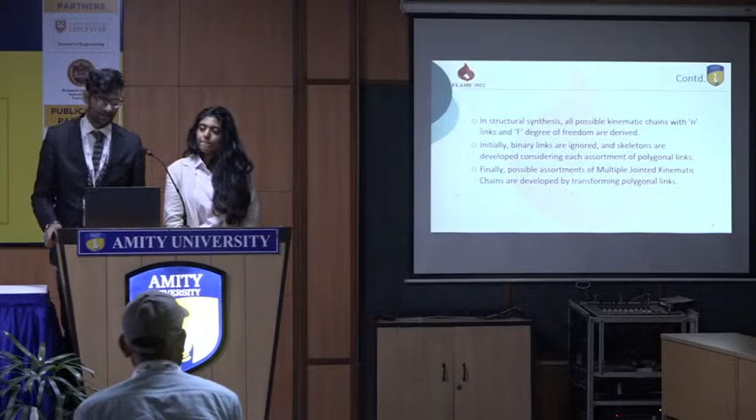Now to do any kind of research or solutions on kinematic chains, you need to convert the ternary or quaternary links into binary links. That is the first and foremost step when applying the polynomial approach. So initially the binary links were ignored because they were already there - we don't need to do anything with them. We need to work straight on the ternary links. So that is what we did.

Now the ternary links were converted into binary links separately, one by one, using the formula of NCR. What that does is convert one ternary link into a binary link at a time, and that gives us different variants of the kinematic chain itself.

And what we did afterwards was calculate the joint values of the same. Calculation of joint values is something we did on MATLAB, and we further applied the poly function available on MATLAB for the same.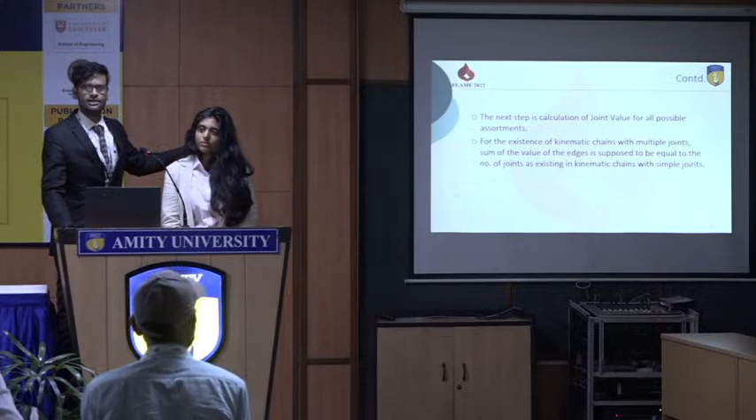Now what that does is, after you get the joint values, you get the base joint values which are absolute - it is when every single link is free, not stationary at all. That is when you get all the absolute values.

Now what you do when you apply the poly function is start fixing links one by one. In this particular case, we took an 8-link kinematic chain, so we started fixing one link after another, and we got different polynomial coefficients. That is the research that we did, and Shauri will explain to you what we got as a result.

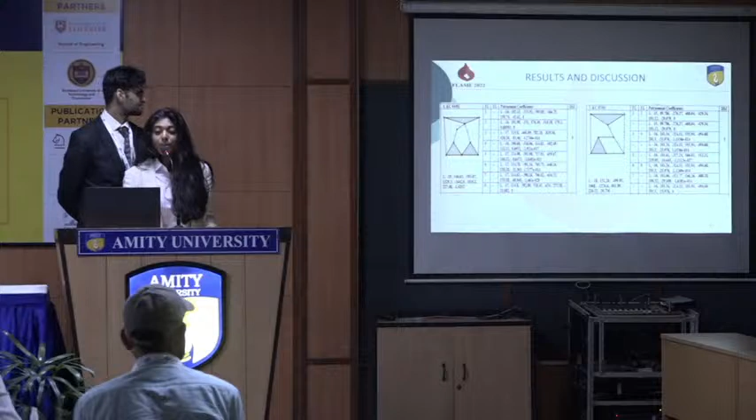So as you can see here, I'm going to move my cursor. These are the base coefficient values, which is basically without fixing any links - they're all random here. But as we fixed all these links, you can see there's 1, 2, 3, 4, 5, 6, 7, 8 links, since we're working on 8-link kinematic chains here. So we fixed the first link, the second, the third, the fourth, the fifth, the sixth, the seventh, the eighth, and we got different polynomial coefficients for each one right here.

And in the second example, as you can see, we have the FL, which is the fixed link value, and then we have the EL. What this basically entails is that we fixed the first link, and then we fixed the second link, and we got the same polynomial coefficients, right? This gives us 5 different combinations right here, because for the first one and the second one we got the same polynomial coefficients, and so on.

That's basically what that entails. Yes, sir. So we finally come down to the conclusion. And as for the conclusion, we get to know that the polynomial coefficients that we obtained were same for the equivalent mechanisms that we made, but they were different for the distinct mechanisms. That is when we started fixing the links.

At the same time, we also want to tell you that this particular approach did not consider the combination of kinematic pairs, like joints being pin joints or any other different type of joints. We considered and we focused mainly on the simple joints. So that is one of the areas that we did not further progress into.

And at the same time, this approach was implemented for multiple chains because that is what we wanted to focus on, because most of the approaches that are out there are right now only specified to 4 links, and that is something that we wanted to change because right now with the advancement in technology, you require more links, you require better movement, you require more precision.

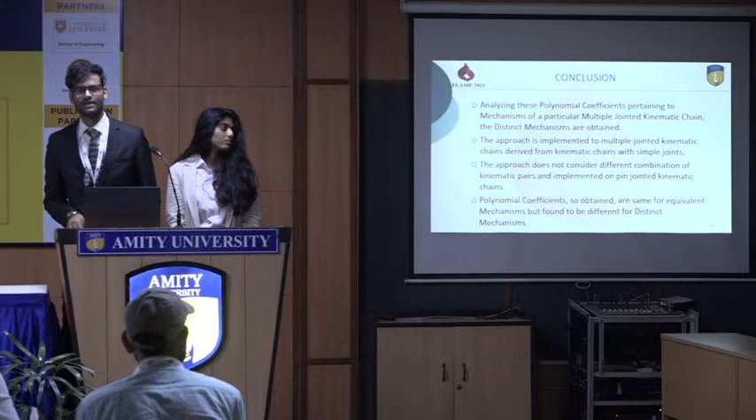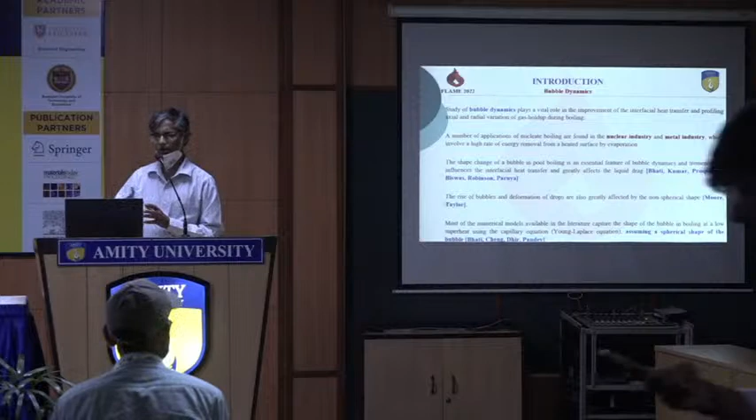Now, the bubble shape changes when it is boiling; particularly on the superheated surface or heated surface, the shape of the bubble always changes. And this is the essential part of bubble dynamics, like when the bubble is growing or collapsing or departing from the heated surface.

And this kind of bubble dynamics feature is very much applicable in the nuclear industry and metal industry, and it is determining the interfacial heat transfer. A large amount of heat transfer it is determining. And since a large amount of heat transfer is required, we have to go by evaporation, which is exercised in the nuclear industry and metal industry.

And you can see that the bubble shape, when it is growing or collapsing, is changing the drag force. It is changing the drag force or drag coefficient when the bubble is moving. And at the same time, the rise and deformation of bubbles and drops is dictated by the non-spherical shape.

And a lot of studies have been done assuming the spherical bubble, but there are fewer studies considering the non-spherical bubble. As you see, the spherical bubble is growing at the heated surface, and here there is a mode of bubble collapse and a mode of bubble formation. There is mode A and mode B.

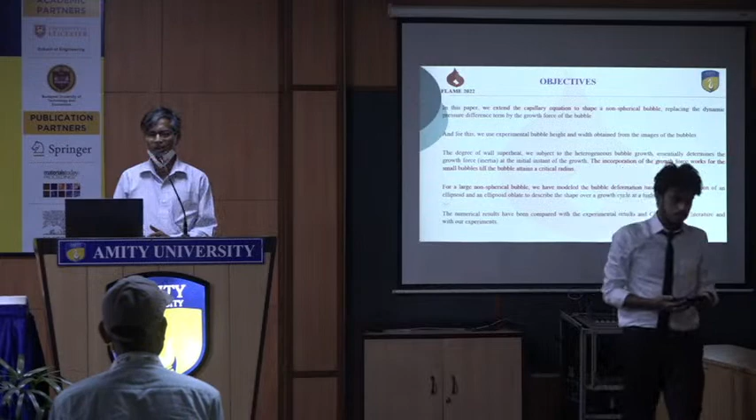So we have done it some other way. For large non-spherical bubbles, we have modeled the bubble deformation, then we have shaped the bubble. Obviously we have assumed some bubble profile, whether it will be spheroid or ellipsoid, and it is done at high superheat. And we have compared it with some CFD data also.

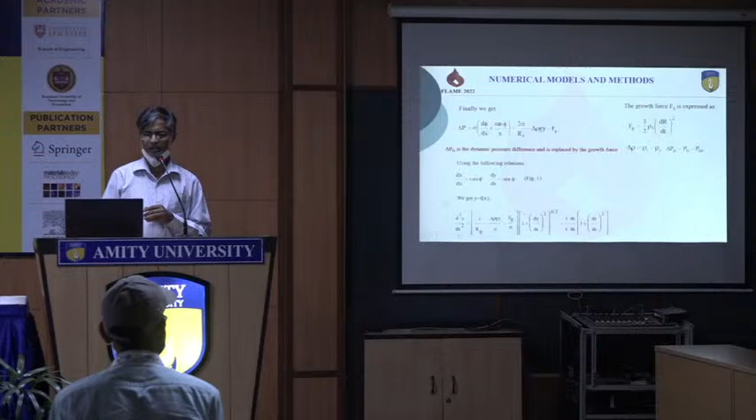And here we have solved this ordinary differential equation by the Runge-Kutta method to find out the shape. We solved it with the second order Runge-Kutta method, by putting dx/ds and dy/ds equal to cos phi and sin phi. Phi is the angle that we show in figure 1. And at the same time, when I am solving this equation, it goes to a certain value of x, then it becomes unstable.

Then we do the backward problem, we start with the inverse problem, d2x/dy2. We transform that equation to the inverse form, where x is the function of y. And that we have solved with the initial or boundary condition x0 and gradient 1. That is for the spherical bubble.

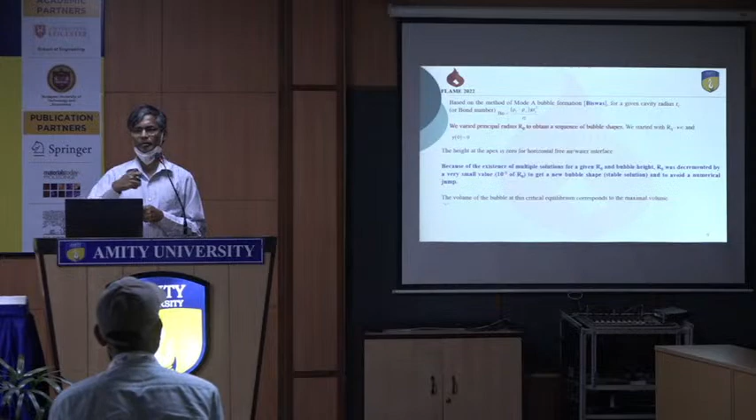And next, we have one problem. When you are doing this shape, spherical bubble or non-spherical, we need to have the principal axis, which is not known to us. R0 is the principal radius that is not known to us. We have to make a good guess. We have to use an iterative method to find out what R0 will be, and we have varied the principal axis to generate different bubble shape profiles. But which bubble shape we take is the one that will match with the experimental data.

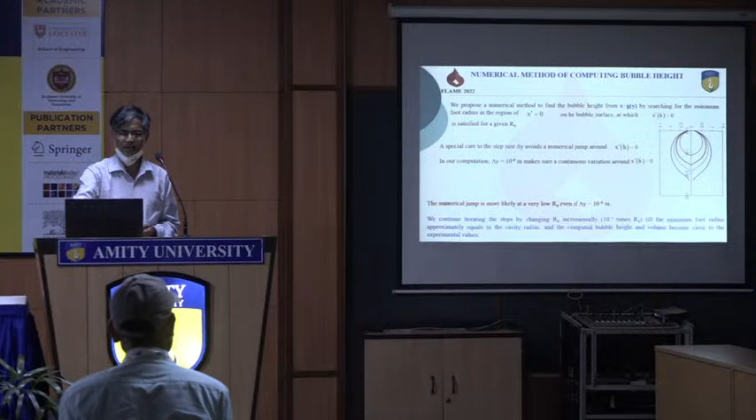There is a zone where the x gradient is less than 0, and you will find the minimum at the neck of the bubble. That last truncated part is the neck of the bubble, and you will find the minimum. You are solving y versus x, no? So at a certain x you will get the minimum value, and then you will get the height of the bubble. That is how.

And we have seen that if you are balancing the hydrostatic force and the surface tension force, then up to a certain critical radius, you can profile the spherical bubble with the Young-Laplace equation. That is the capillary equation. After that, it will not work. We have found where the capillary equation fails to shape the non-spherical bubble. We have got the criteria.

That is basically 2 sigma by R0, the surface tension force, will be greater than delta rho g y, where delta rho is the difference between the gas phase density and liquid phase density, and g y is the hydrostatic force.

That means surface tension force will be higher than the gravity force, static force. Then it will remain spherical. Otherwise, it will be non-spherical.

Oh no, but I have a couple of slides. Please give me 2 minutes, 3 minutes.

All right. Now, what we have done for time of deformation: we have found that when it is in the growing stage, by applying the criteria that when static force is greater than the surface tension force, the bubble will start deforming. At that time, we can say that the bubble is going from spherical to non-spherical. That is the indication of the criteria we have found analytically.

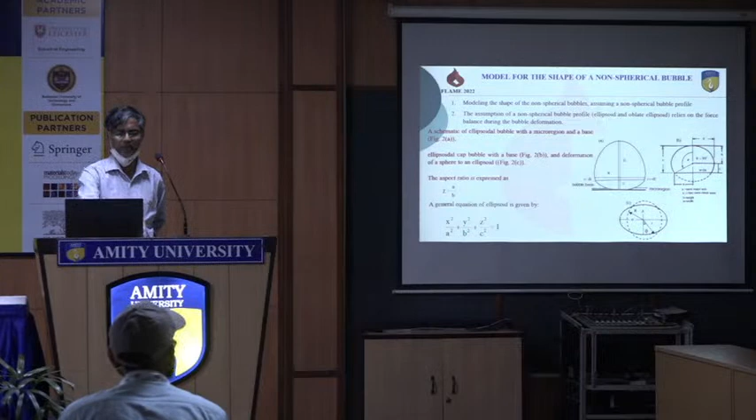At the same time, we have considered a bubble profile to find the bubble shape. We picked an ellipsoidal bubble profile. Then we find the aspect ratio. Aspect ratio is basically major axis by minor axis. That aspect ratio we found, and we put it in the capillary. This is the deformation equation, and zeta is the deformation term.

This ellipsoidal profile equation and this force balance equation in terms of the polar coordinate have been solved simultaneously. But one problem is there: previously people solved it, but what will be the appropriate value of B is not known. Initially, we took B equal to A by 1.1, which is not reasonable. We published a couple of papers and people accepted that, but this 1.1 ratio is heuristic. It does not obey any physics.

Then we transform this deformation equation to the polar form, r by capital R equals 1 plus zeta, called the scaled deformation function, with cos phi, the polar coordinate angle. This has been done previously. Then we got the solution in terms of the Legendre polynomial, giving the scaled deformation function, which is minus 3 by 32 Weber number, and we use that Weber number for the aspect ratio, so A and B can be calculated instead of assumed. This is the new thing we have contributed.

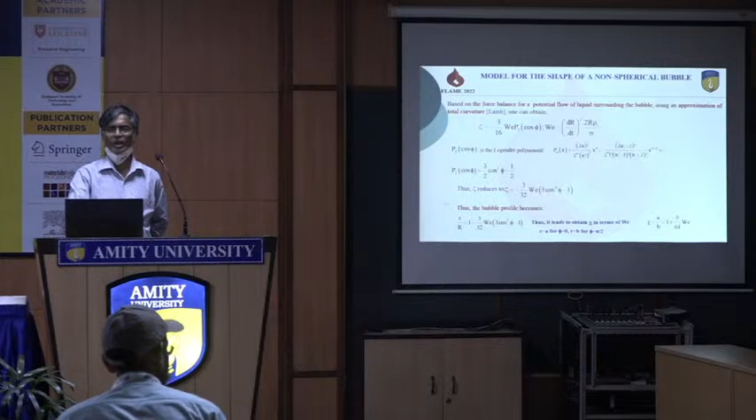In this algorithm, we are calculating from minus R to plus R and generating the profile. A lot of calculation we have done here. I am going quickly to the result: this is the spherical shape we got, and it matches the experimental data. The Young-Laplace equation matches the experimental data, but for the non-spherical bubble shape it does not match, and that we have done here.

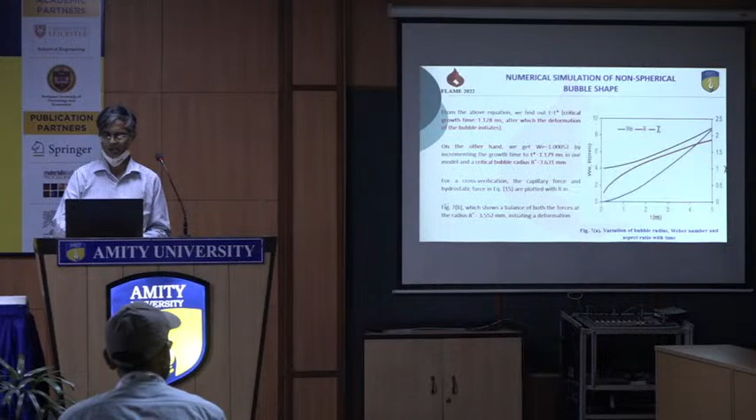Here is the plot showing how the bubble is deforming over time, with the deformation as the chi value. Chi value is the aspect ratio. This is the point where we show that. Yeah, I am winding up. At the same time, we show how the bubble shape is changing from spherical to non-spherical, and ultimately to the hemispherical or ellipsoid. That bubble sequence is generated by the newer method.

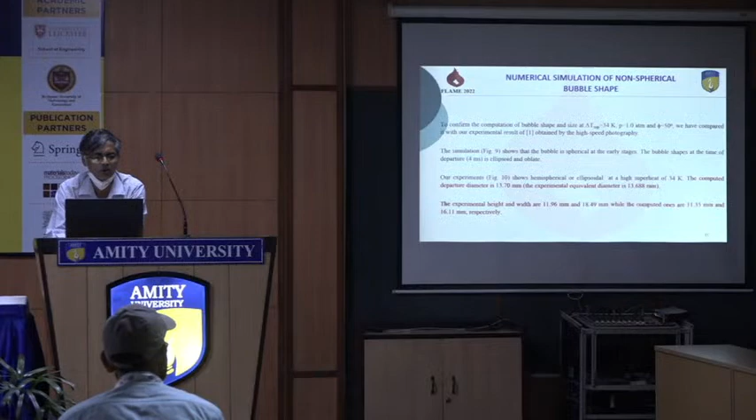And this is the comparison with the experimental data that you see. It is our experimental data. Then we have done a couple of bubble departures, and we have compared with the experimental data, and we have seen that the Young-Laplace equation cannot be used to shape the non-spherical bubble. That is the conclusion. We have to consider the drag force, and also we have to model the deformation to shape the non-spherical bubble that we have during boiling bubble growth and collapse.